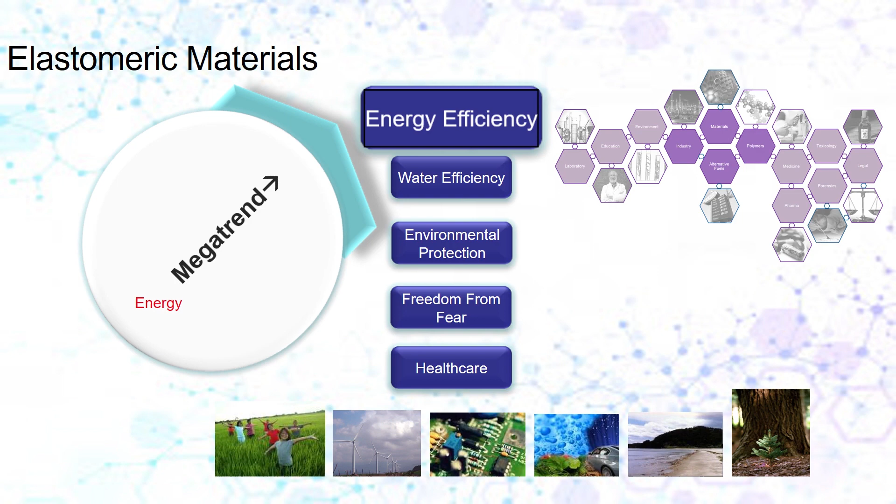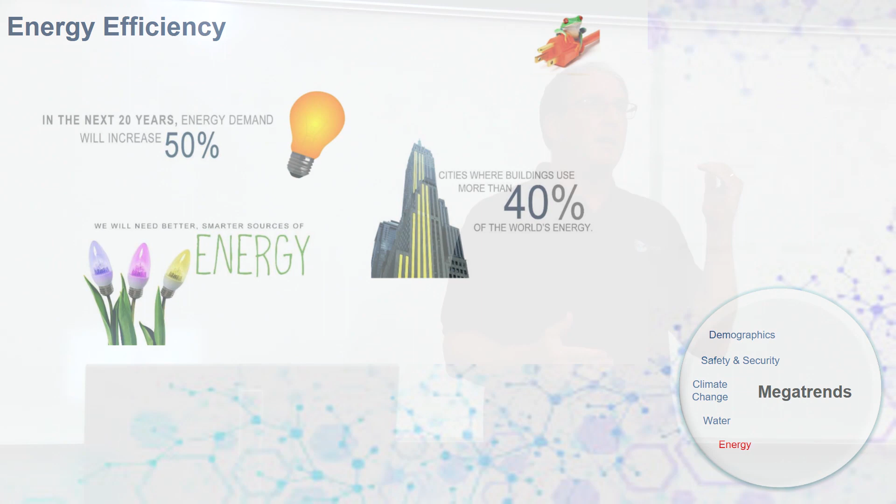Did you know, as a matter of fact, that in the next 20 years, energy demand is going to increase by 50%? That's because of population, and that's also because of a move from an agrarian society to a populous city society. And in those cities, they will demand...

...40% of our energy requirements worldwide. And that factor is growing. That's more than planes, trains, and automobiles, transportation. That's more than industrial. That's 40% of the total energy output of the world. We will need better and smarter energy sources.

Think renewable resources. I started the talk by saying what a chemist does is convert resources, yes? So we have to think about the non-renewable resources we currently use, which are coal, fuel, crude oil, nuclear, and even batteries—these are non-renewable—and start moving towards sun and wind and hydroelectric.

So how can a chemist light the way? Let me show you some examples—something I've worked on, which is LED lighting. And you see these all the time now: very lightweight modules, very high intensity lights that change color, can move directions in automobiles.

You've seen stadium lighting, where for very little wattage or very little current, we can produce much more light energy than incandescent technologies. And it's all based on that light-emitting diode, that little tiny chip that's buried usually many, many times over in these type of lighting systems. If we dissect that little thing, we find out that it actually has a diode inside that vibrates at a very high frequency.

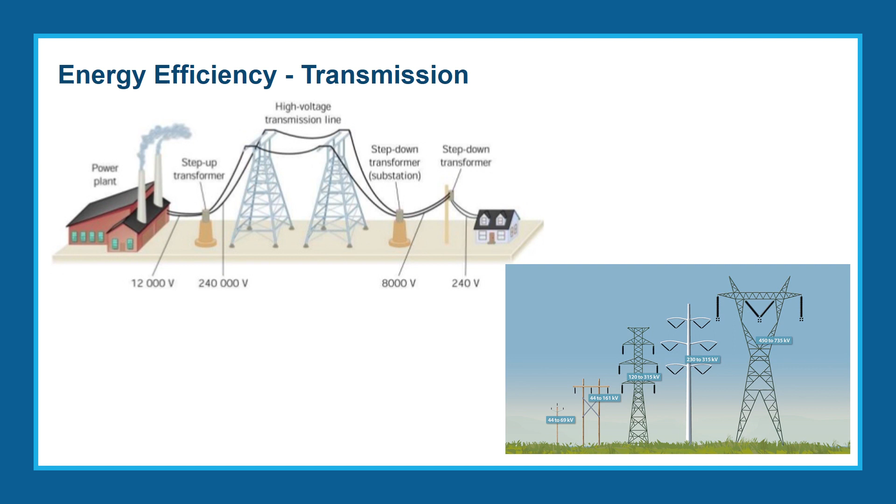What we want is an environment that looks a lot like this. But what we're starting to see is environments that look like this. So how can chemistry help? Because we're going to this.

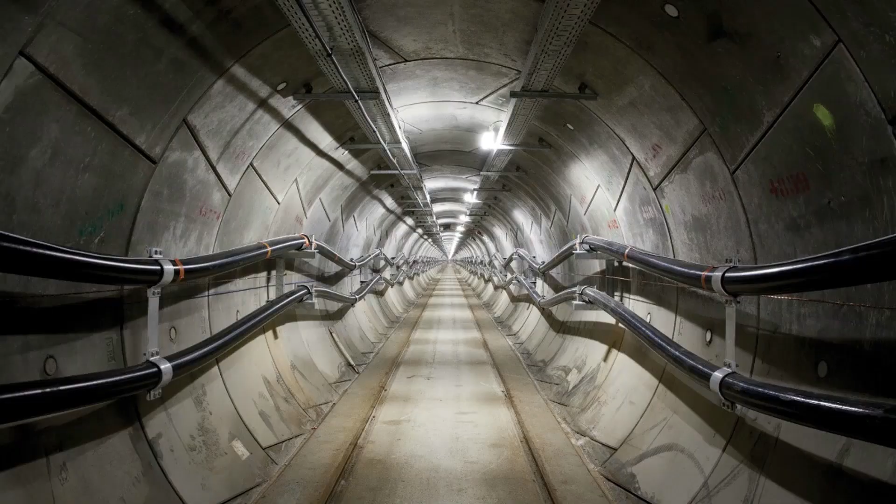Underground electrical distribution. You see these 4 cables. Each one of those is 750,000 volts. That's 3 million volts moving through there. If water or moisture gets in that tunnel and comes in contact with the electrification of those wires, you'll have an explosion that you'll certainly hear about on the news.

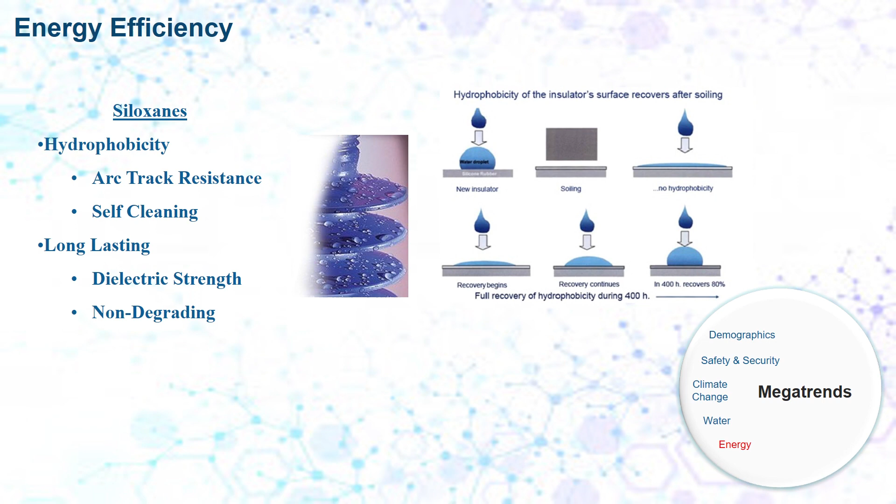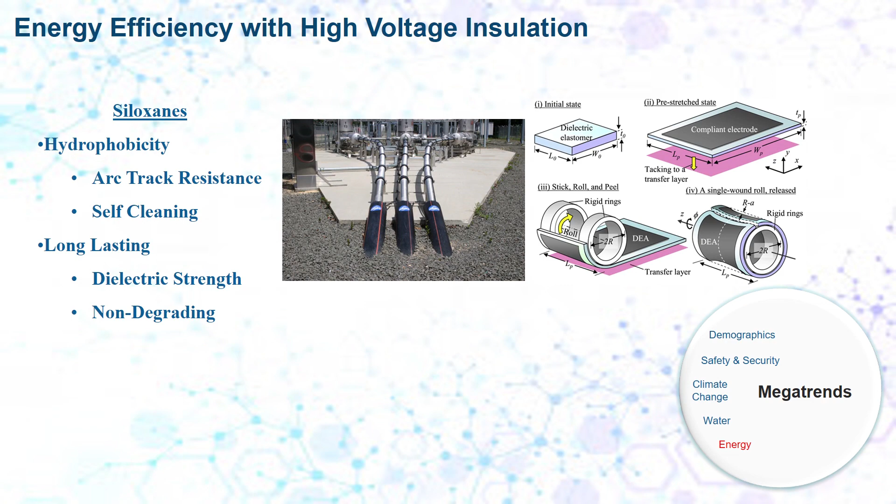So we developed a dielectric-proof siloxane system that first uses the hydrophobic nature of siloxanes to shed water. In studies, we're proving that that will go forth and do that for 100 years, so polymers that last. And in long-lasting, we have to build the dielectric strength of these polymers to a higher degree, which we do with multiple layers of sheaths. But the most important aspect are things that I've helped develop in the dielectric elastomer range. That's what makes these cables and this underground electrification much safer.

Birds, human beings, animals—as we increase the voltage of these lines and have them above us, they emit frequencies that interfere with biological systems. So placing them underground, around a conduit that's grounded itself, isolates us from that problem, and that helps the environment. It's certainly a megatrend.

So part of what I do—we took something of poor value and built it into something of high value. That was in terms of carbon black and a polymer called ethylene propylene diene polymer.

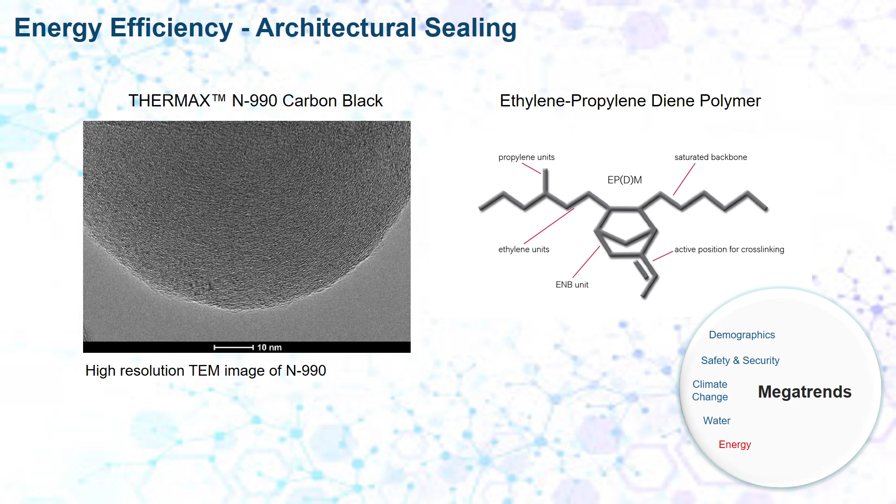Now you have to understand something first when I tell this story: up in Canada and other places where there's permafrost, methane gathers under that hard permafrost soil, what they call the hydrate stable layers. And that methane bubbles out. Did you know that methane is actually a stronger greenhouse gas than carbon dioxide? Sequestering methane is absolutely necessary.

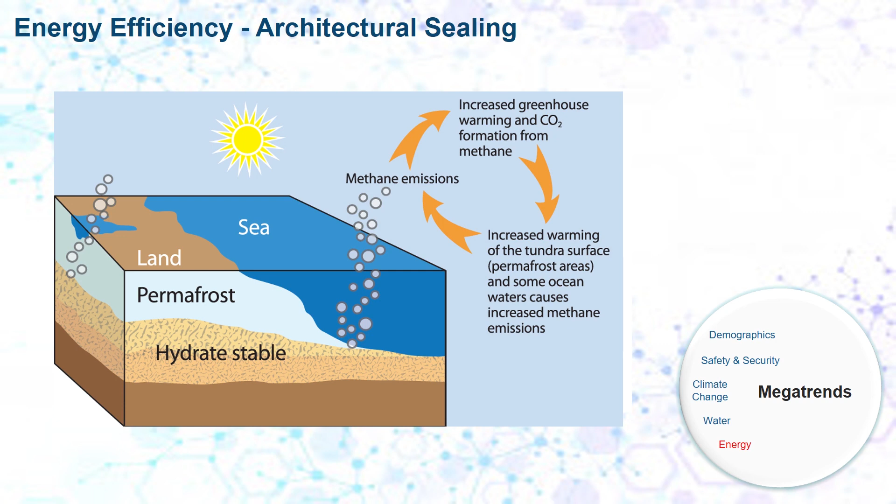And we found a way to do that by running the natural gas through a reactor that separates the hydrogen from the carbon. We burn the hydrogen off with oxygen, and what does that create? Water, steam. We take half of the energy and run 3 cities in Canada. All of the carbon, 100% of it, is converted to carbon black, a solid particle, which we condense from about 1,000 times in volume down to 1 unit of volume.

That carbon black is then put into rubber to make it strong and thermally insulated. And the rubber itself comes from a renewable resource—we make it out of sugar cane or corn. We don't use crude oil because that would be non-renewable.

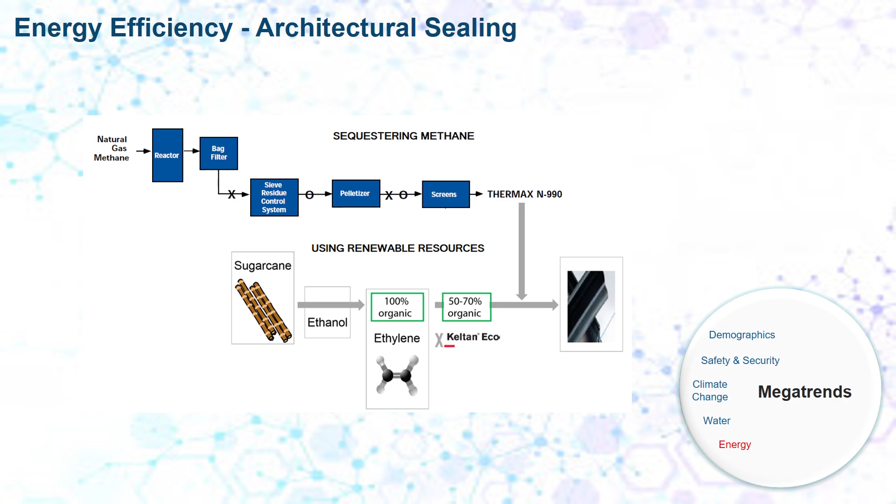We use natural crops, usually the stuff people don't want to eat, and then we turn that into ethanol. We synthesize that as an organic polymer, add the carbon black to it, and get thermal insulation seals that are now 98% efficient, turning our cities into fortresses that can protect human beings from the cold and from the heat.

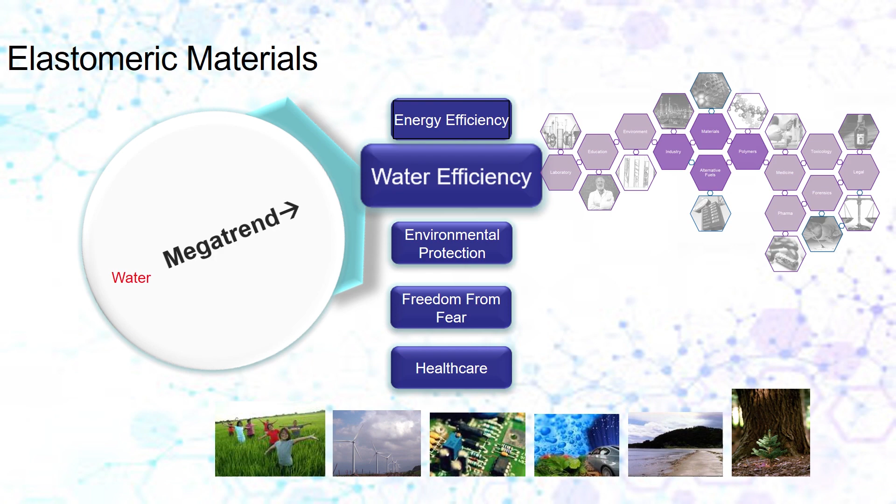Well, that was energy. Let's move fastly along in the megatrends to water. Did you know that eating beef takes a lot of water? We've all heard this: 1 liter of bottled water takes 4 liters of water to manufacture.

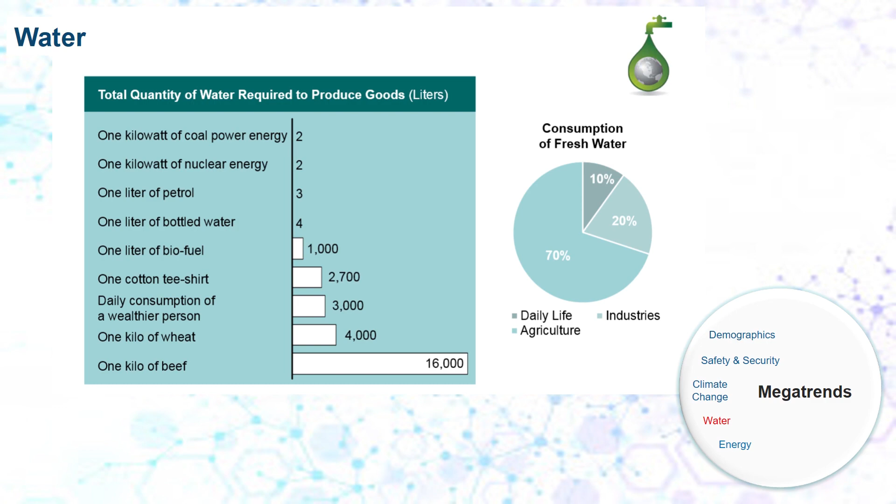Water, as population centers grow, fresh water particularly, is of major concern. The consumption of fresh water looks like 10% from the cities, but that's growing. Industries take 20%, but most of it is agriculture, a full 70% of freshwater consumption.

I want to relate this story as an interesting day for a chemist. About a decade and a half ago, I had 2 meetings in one day, one in the morning and one in the afternoon. My first meeting was driving right by here up to Pasadena to Jet Propulsion Laboratory, and I was very jazzed about this meeting. I was there talking to other chemists, PhDs, about how to get a rover to land on Mars. Those first rovers were called Spirit and Opportunity.

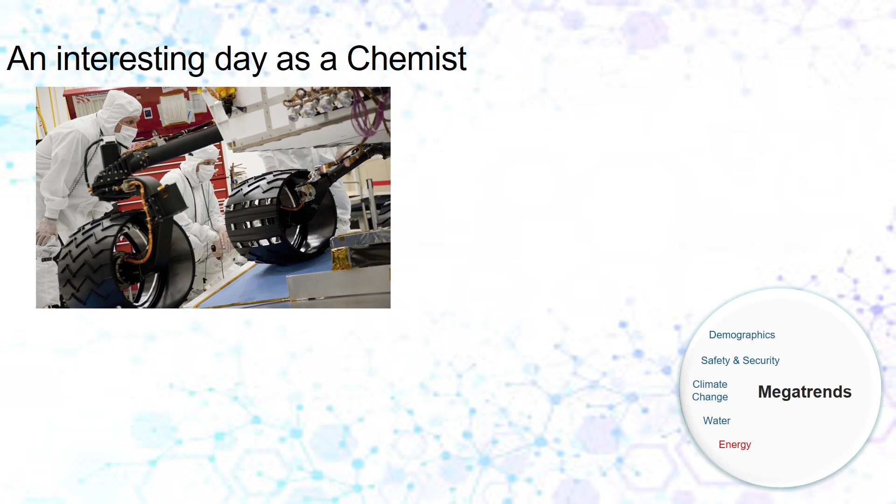And they had a problem. Mars is cold, and polymers freeze. If they freeze, and the rover's moving, the vibration will break all the wires, wire harnesses, and electrical connectors, and that rover won't last very long on the surface, maybe just a few hours. But we had just worked on a phenylated siloxane polymer, another siloxane derivative, that got us down to minus 182 centigrade before it hardened. Guess what the lowest temperature on Mars is? About minus 170. So we had a Mars-capable polymer. I was so jazzed because it was a great fit.

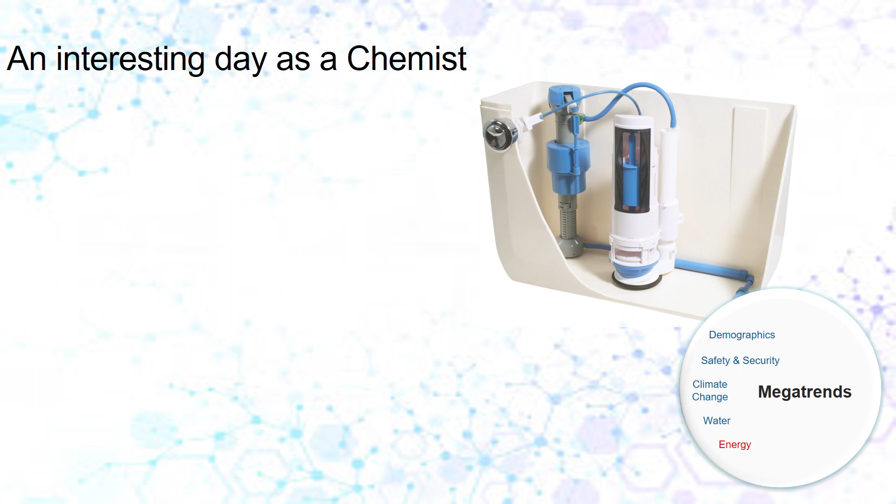We stayed there. It was an hour-long meeting that I just got out of at lunch to get off to my next meeting, which was down in San Clemente. I drove right by Cerritos down to San Clemente and went to a company called Fluidmaster. What do they make? Toilet seals. As a chemist, I'm trying to get something to Mars in the morning, and now I'm trying to get water reduction in each and every flush. I thought, maybe this second meeting really isn't going to be worth it. I mean, I was so jazzed by getting to go to JPL.

On one hand, the Mars missions were perfect landings, 300 million mile hole-in-one. It found blueberries, which were actually hematite formed in the presence of water. We proved that water was once on Mars. The atmosphere contains storms and twisters. Oh my, there's weather on Mars. Craters of uncovered rock formations gave the first off-world geology lesson, and they're still talking about it today. Because of those electronics, we were able to put a human eye on board, and we had panoramic views, just like you were there.

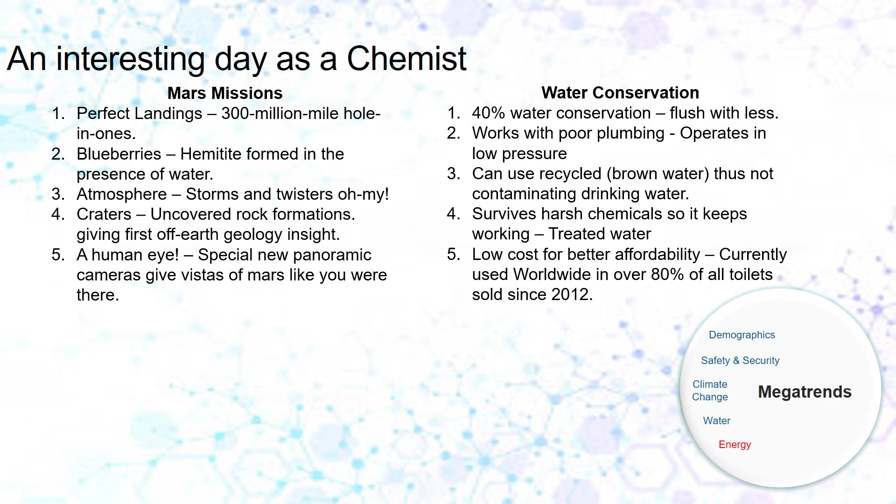But on the other hand, the second visit, we found a way to conserve 40% of the water each and every flush. It works with poor plumbing, low water pressure. It can use recycled brown water, contaminated water, thus not using freshwater supplies. It survives harsh chemicals, so we can use internal septic and not dump that sewage into freshwater supplies. There was low cost and better affordability, and today, since 2012, 80%, almost every single toilet worldwide, uses some of the materials I helped develop for that seal.

That's kind of boring though, right? On one hand, I got to work on these babies. On the other hand, I realized that fresh water, or the lack thereof, is killing major populations. In fact, toilets use 24% of the freshwater supplies worldwide, and leaks, which I'll talk about in a minute, are set at 12%.

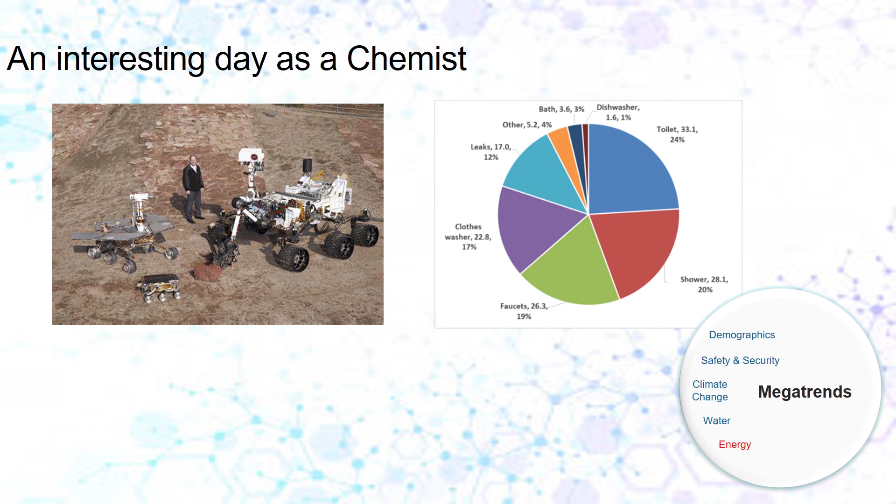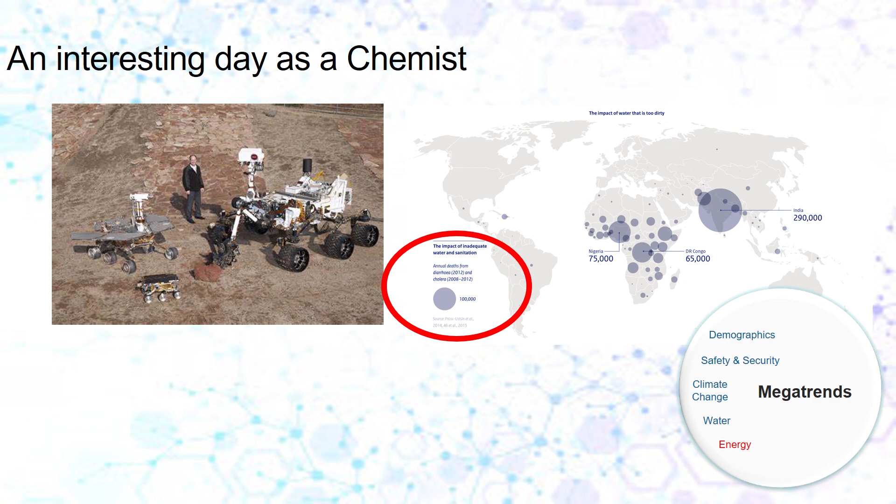I found this very interesting chart where in the years 2008 to 2012, before we had this system, these blue circles represent areas where cholera and diarrhea type diseases occur, and the size of the circle shows you the severity. In fact, over that period of time, it was estimated that over 100,000 people died from these diseases because of lack of fresh water and contamination with sewage.

I think back to those days, what was the most important meeting? Was it the one that got the rovers up there? Or was it the one that may have potentially saved tens of thousands of lives every year? I don't know, but that's what a chemist can do.

So, now, water efficiency also is an important aspect, especially around here in LA.

A couple years ago, there was a huge leak in the Pauley Pavilion at UCLA. I show a picture here. That pavilion was swamped. All of the seats, the entire thing had to be reconstructed. It was down for 18 months, cost millions of dollars.

We see this happening over and over again. In fact, the EPA is estimating over $300 billion in the next 10 to 20 years to build the infrastructure up.

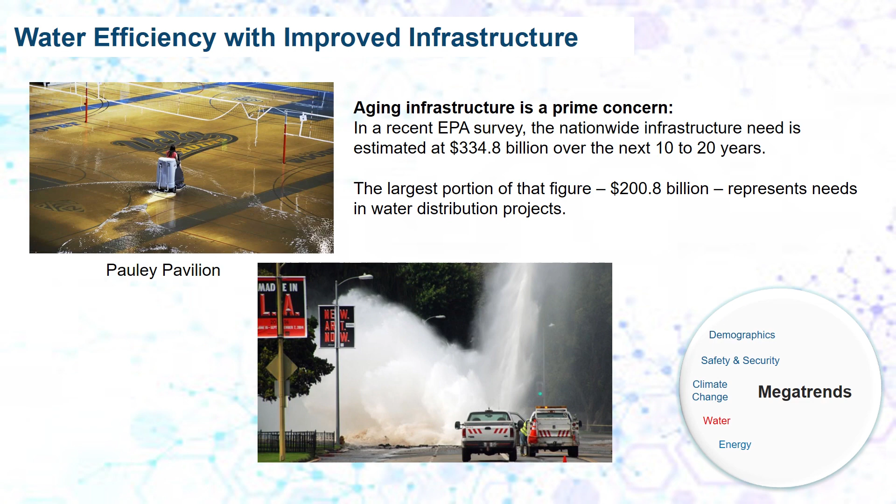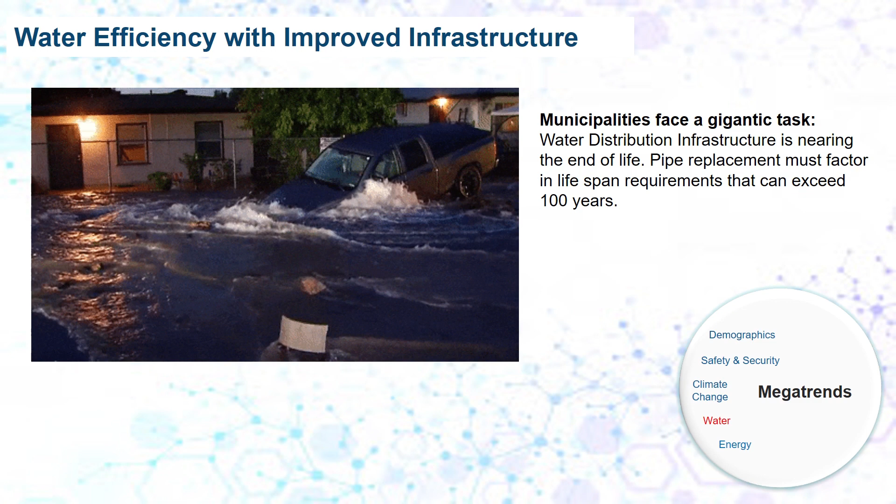The largest portion of that, some $200 billion, represents the need for water distribution projects within municipalities. And the municipalities themselves are asking questions: we don't want to replace this stuff every few years, we want 100 years before we have to touch it.

But that, with existing technologies, is a very hard task indeed. In fact, they only have 5 choices. They have ductile iron piping, vitrified clay, and concrete, but these 3 have some inherent problems. They're just exactly what's there now, with short-lived life expectancies.

But we're now developing polymer systems. Yes, chemistry again, HDPE and PVC. But what we find is they still have a strong failure mode called sealing at joints.

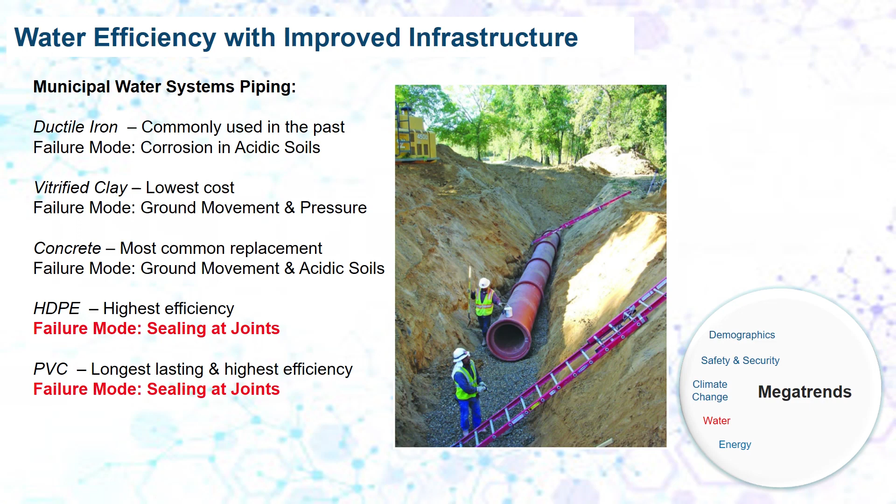So this is the old way we created water piping and sewage piping. This is the new system. These, particularly with PVC, last 100 years under the ground. Polyvinyl chloride is resistant to microbial growth, and it will hold together for that period of time. You see the black seals inside the blue flanges, and the brown seals outside of those pipes.

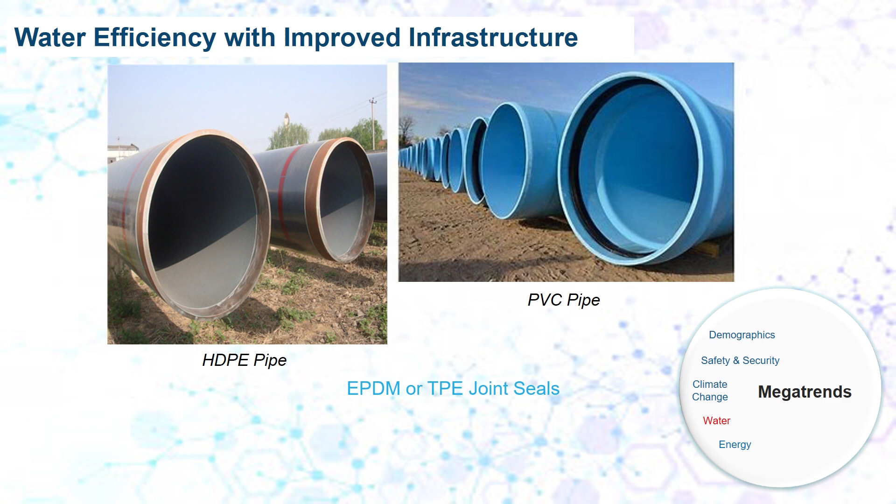Now, what we're working on right now is using that eco-friendly EPDM and Thermax N990 to take these nuisance methane gases, sequester them, and actually use that to control our environment. So write this down: double whammy. That's what a chemist can do. We can take a nuisance gas out of the environment and we can put it to use to further protect our environment. Double whammy.

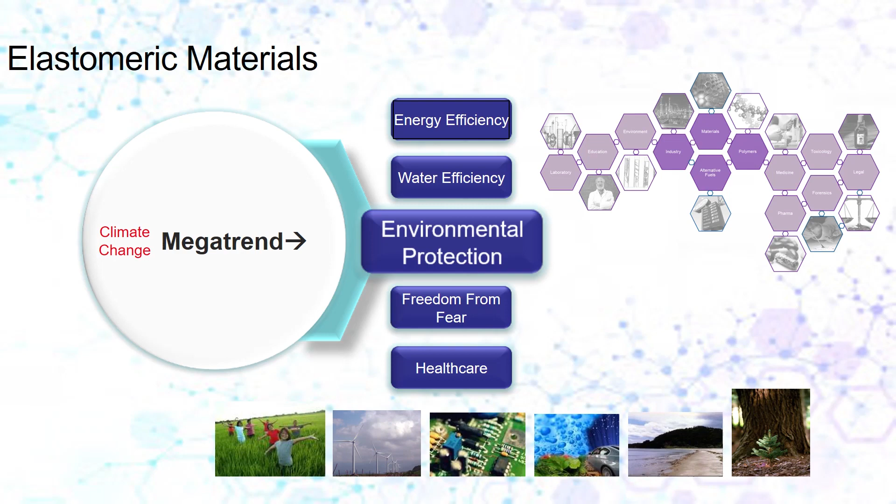So let's switch to another megatrend, climate change. And let's look at environmental protection. I want to talk a little bit about burning of fossil fuels. It's a little bit of my pet peeve, but not a political one like we see in the news.

As a chemist, raw materials are what makes things work. And if we keep burning all of the important raw materials, someday we won't be able to make polymers anymore. And that will be a very bad day. So I have, as a chemist, an even greater need to protect the environment than, say, the common citizen. It's my whole way of doing business. Those raw materials are important to us.

So did you know that beyond CO2, and we hear a lot about CO2 generation and the greenhouse gas effect that creates, VOCs are another important issue. VOCs, volatile organic compounds, are prevalent from both industries and transportation. We've done a lot of work on that because VOC mixing with NOx gases produces a high degree of ground ozone, which is also very poisonous to human beings, very destructive.

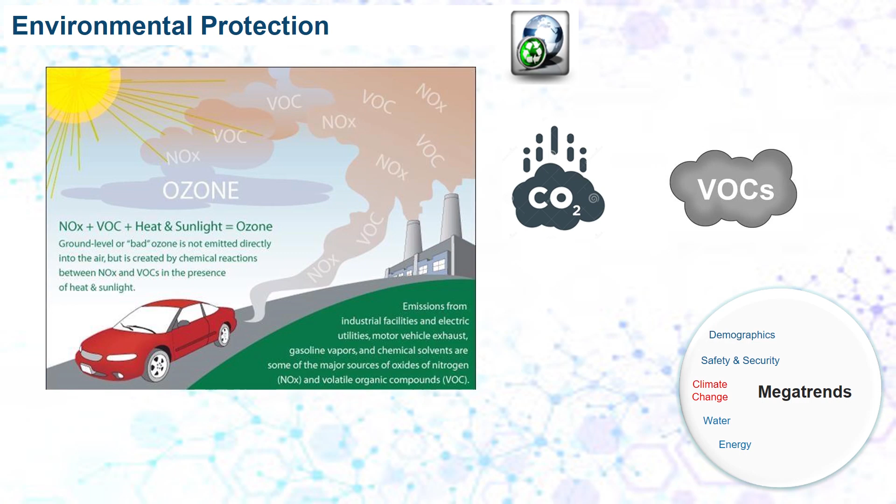And so we've worked on programs based on fuel recovery. The fuel vapors - you probably go to the gas station and put your nozzle in a tank, and around that is a sheath. That sheath is stage 2 vapor recovery, but it's only about 70 to 75% efficient. We're now designing onboard refueling vapor recovery systems that will take that to almost 100% efficiency.

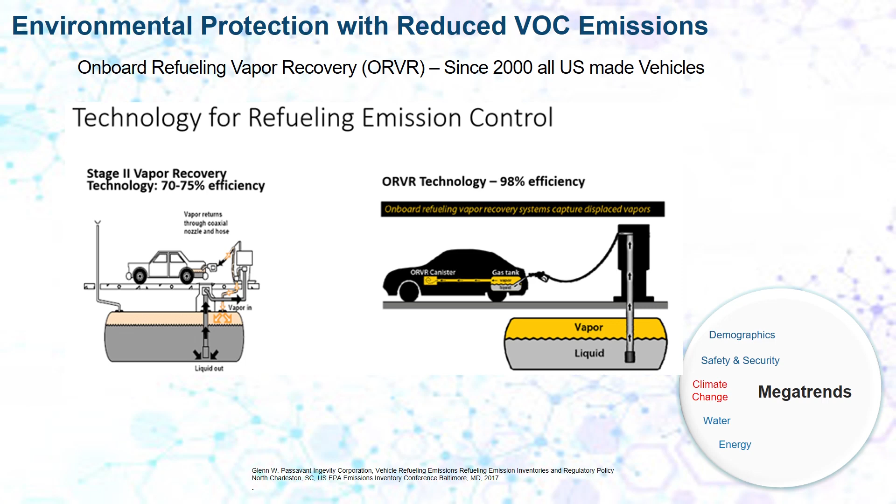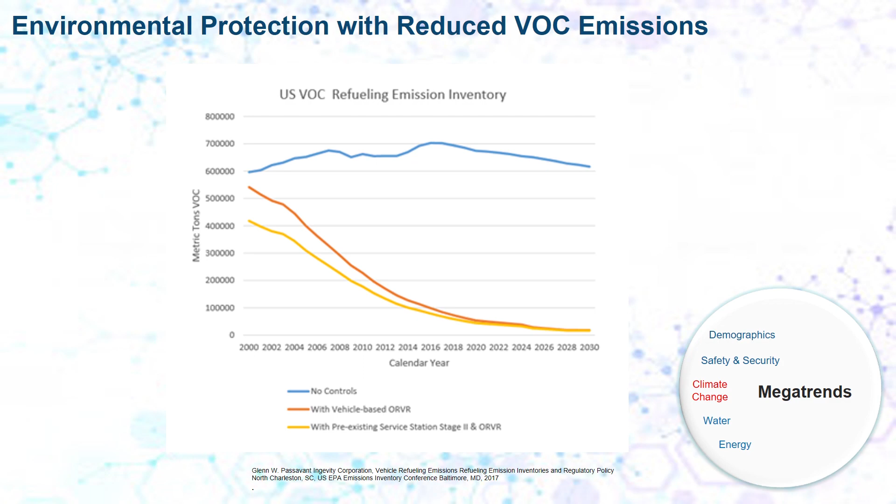And the way it would look in 2020 today, if we hadn't built these recovery systems, we would be putting 700,000 metric tons of VOCs into the air, which would be responsible for over 40% of the global warming power. But because in the United States, and only the United States, we've implemented this, we are saving the environment. Other countries like China, Asia in general, and India are not implementing these types of savings.

And this is some of the areas we need to focus on. It's not just CO2. Man is creating an indelible imprint on this environment, and we need to look at all those sources, not just focus on what the news asks us to focus on.

So how do we do that? With something called fluoroelastomers, fluorinating elastomers. And we do this with ethylene propylene again, and we are fluorinating them with halogen sources, fluorspar. We've just opened new mines in the US so we can generate these polymers.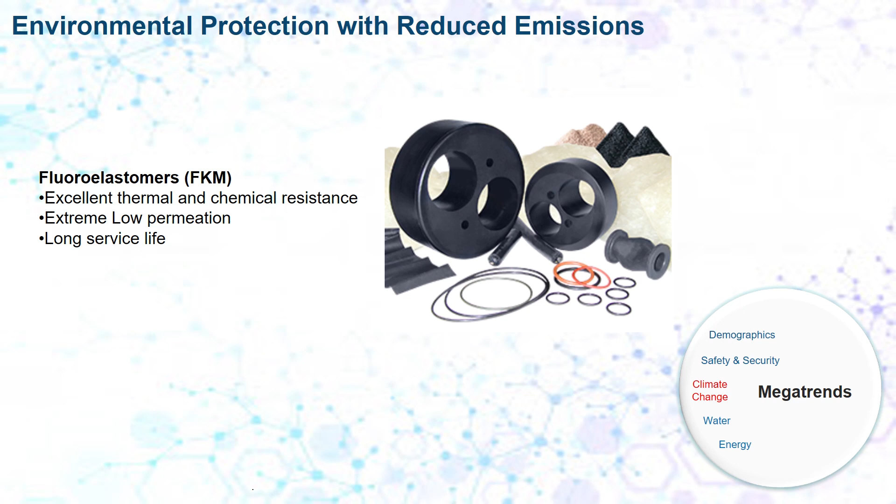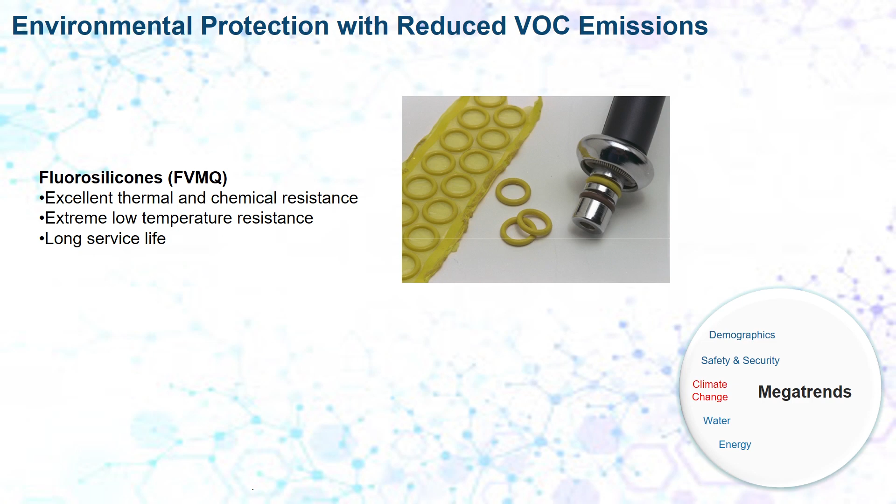So here's my story. In 1990, if you bought a car then and left it with the engine running inside your garage, or the engine not running inside your garage or on the driveway, that vehicle would pollute the environment more than a modern automobile traveling down the freeway at 70 miles an hour.

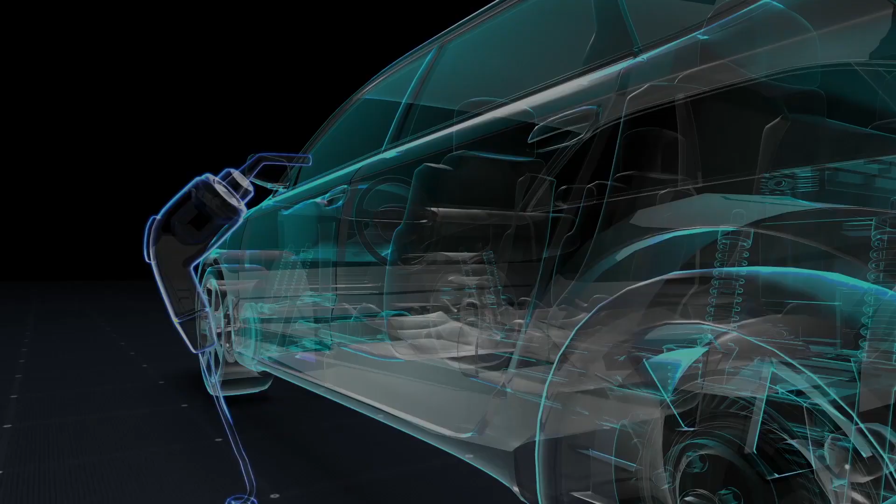Electric vehicles are on the rise to help reduce greenhouse gas emissions, but they do have some constraints, such as long charging times and limited accessibility of charging stations. What if we could charge our vehicle batteries on board using hydrogen fuel cells? Or even better, what if our vehicles had efficient storage, supply, and refueling systems designed for hydrogen fuel cells? Revolutionary fuel cell vehicle designs using polymer electrolyte membrane technologies, also known as PEM technologies, are already starting to emerge. RD Abbott teamed up with Cancarb and Arlanxeo to explore elastomer sealing performance advancements using Thermax N990 and X-butyl bromobutyl designed for hydrogen fuel system technologies. In this study, we employed hydrogen permeation testing at elevated 90 degrees Celsius to better mimic the current operating conditions for PEM fuel cells.

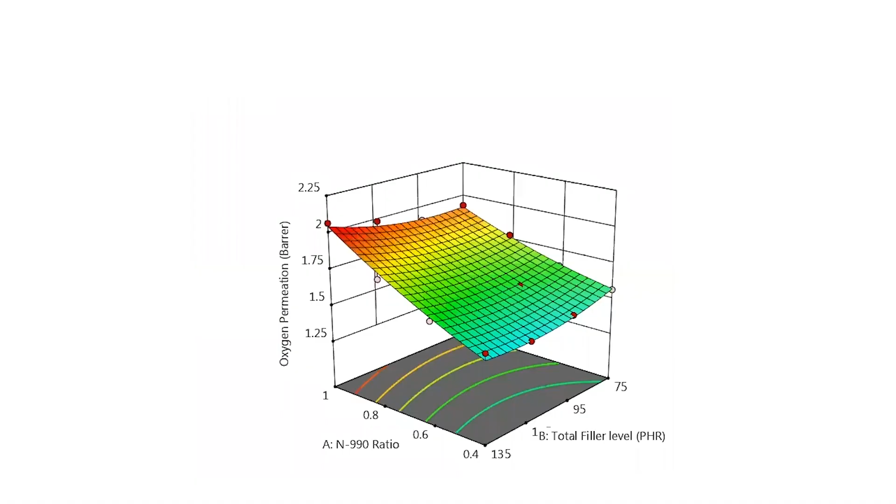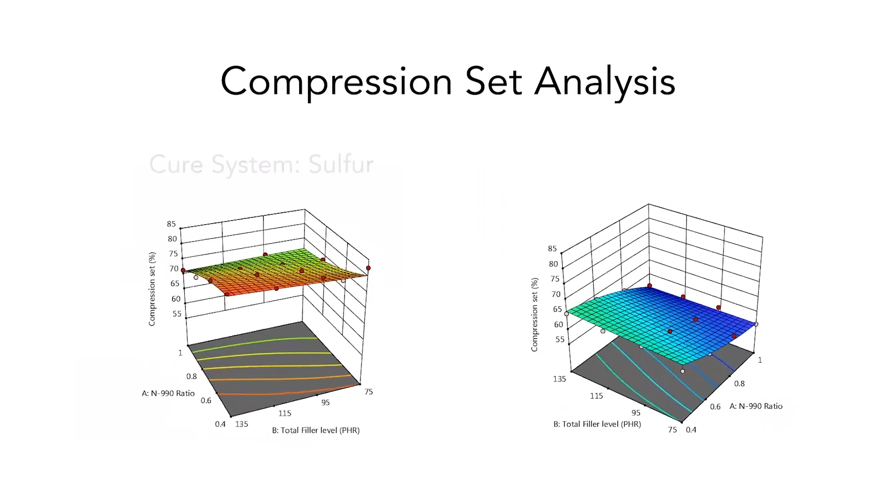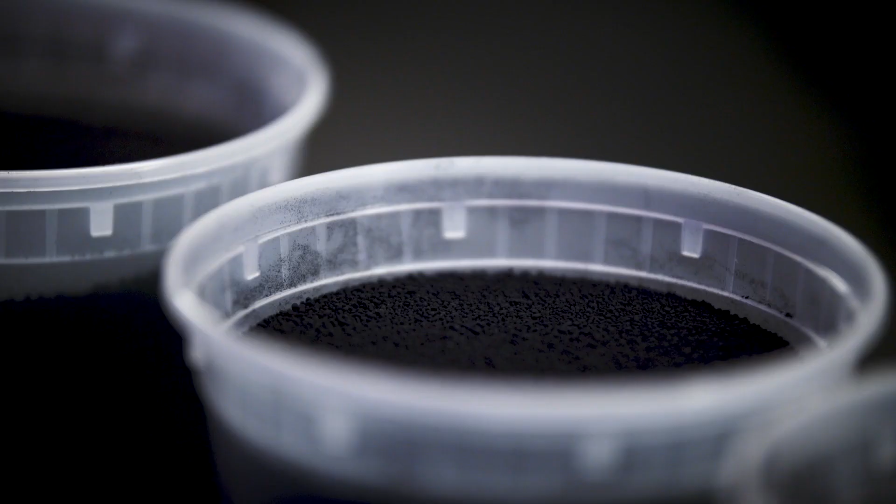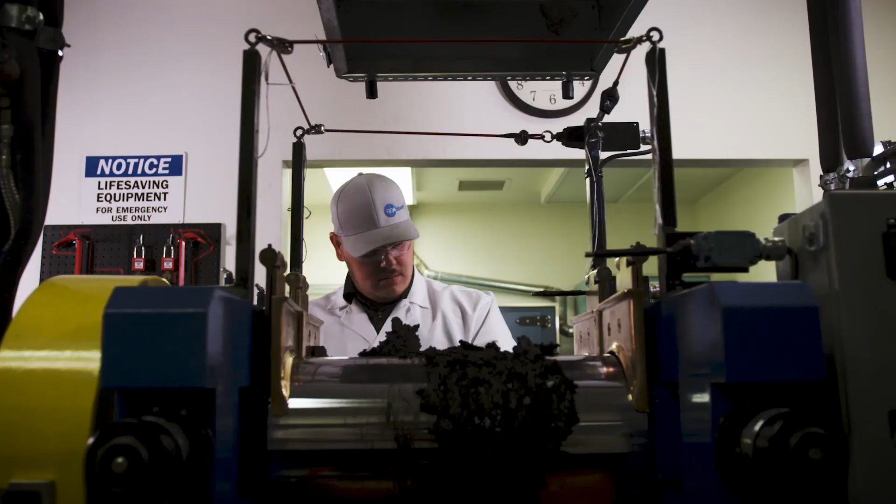We evaluated these permeation-resistant polymer systems with synergistic tortuous path mechanisms in a fuel cell operational environment. Based on our findings, here are some benefits for using Thermax N990 and X-butyl bromobutyl-based compounds designed for use in hydrogen fuel system applications. With Cancarb's Thermax N990 carbon black, enhanced tortuous path permeation resistance with quasi-graphitic structures filler technology, optimal sealing performance with key physical properties such as tensile and compression set, excellent molding and extruding processability, and economic advantages from high filler loadings. With Arlanxeo's X_Butyl bromobutyl polymers, superior permeation resistance and versatile cure chemistry of the base polymer, enhanced processing performance and physical properties, and acceptance of high Thermax N990 filler loadings.

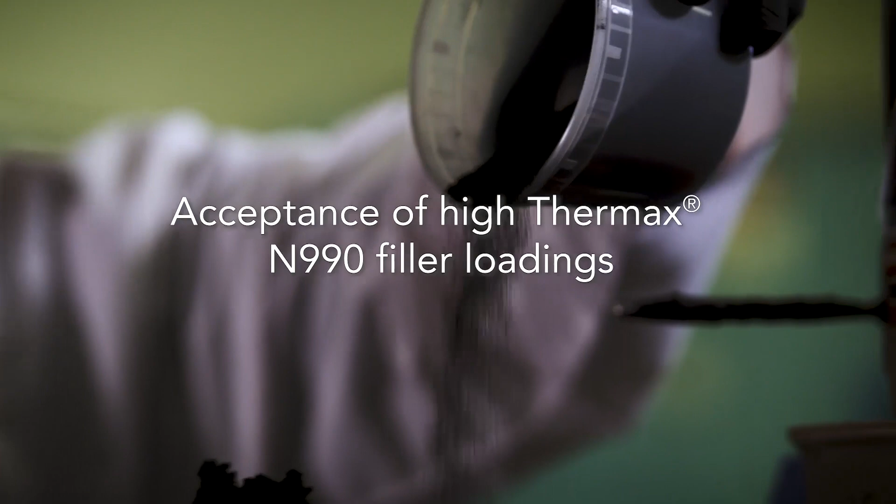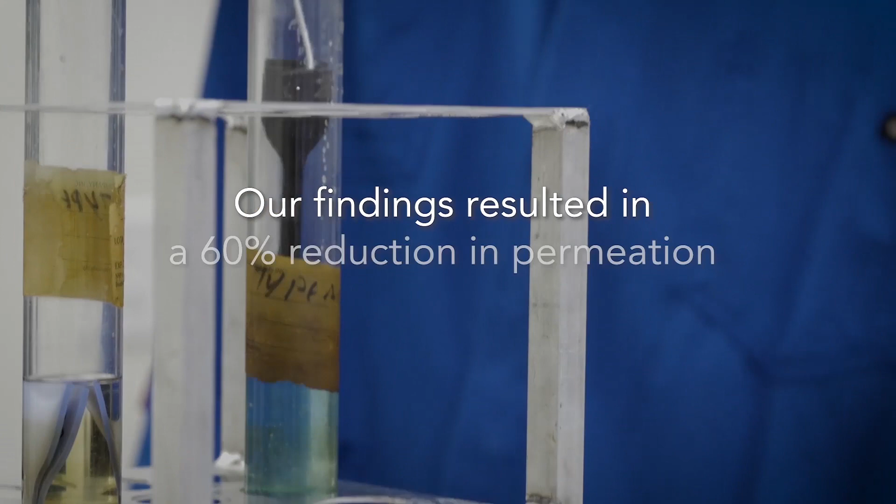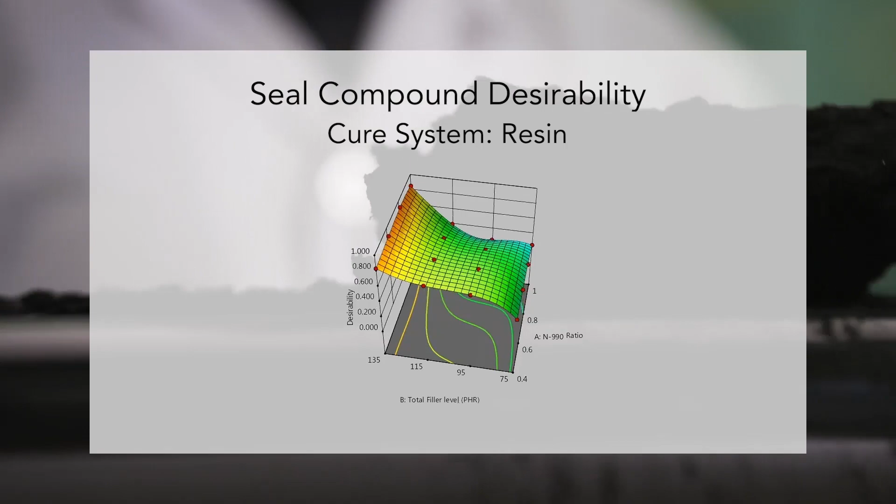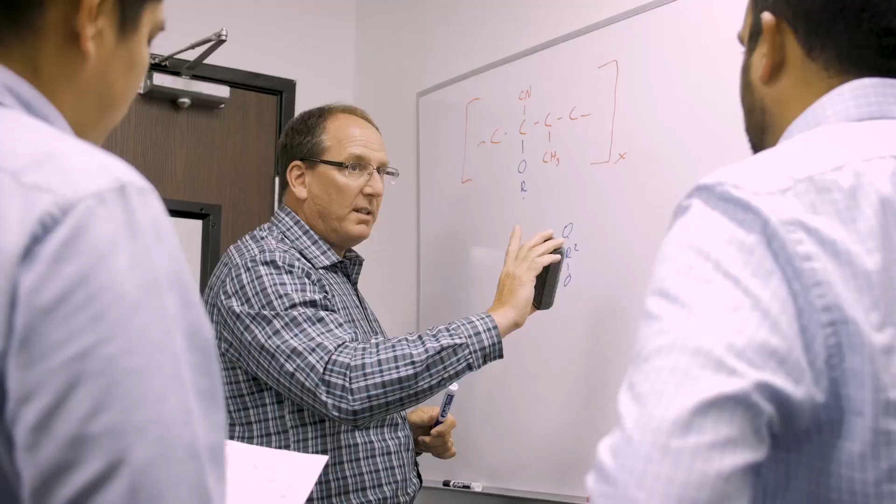Potential applications include gaskets, hoses, tank linings, and O-rings. Our findings resulted in a 60% reduction in permeation over traditional technologies. This indicates that elastomeric seals using Thermax N990 and X-butyl bromobutyl greatly minimize hydrogen fuel losses. Not only can these advancements improve the efficiency of hydrogen fuel cell delivery systems, but they can also lead to safer operation overall. This is just the latest collaborative applied curiosity from RD Abbott and our supplier partners. We're working to answer complex questions, improve sustainability, and promote positive environmental changes.

So this is a paper that was presented. You can definitely get on the website and read my paper. It's good bedtime reading, I promise, you'll be asleep by the third page. It's papers that we present when we have these important findings. Last year I gave five of them at the ACS. This year I gave three of them.

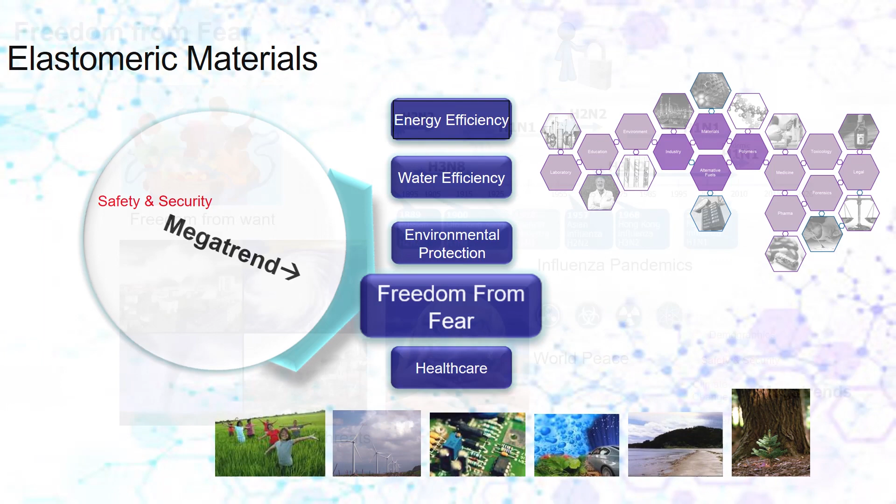So, climate change. It's a very political issue, but I hope that we vote our conscience coming up. Safety and security, the freedom from fear, is our next megatrend. Let me say that we probably can't do much about freedom from want or catastrophic threats or world peace with chemistry. But we can definitely find ways to affect our safety with respect to influenza pandemics.

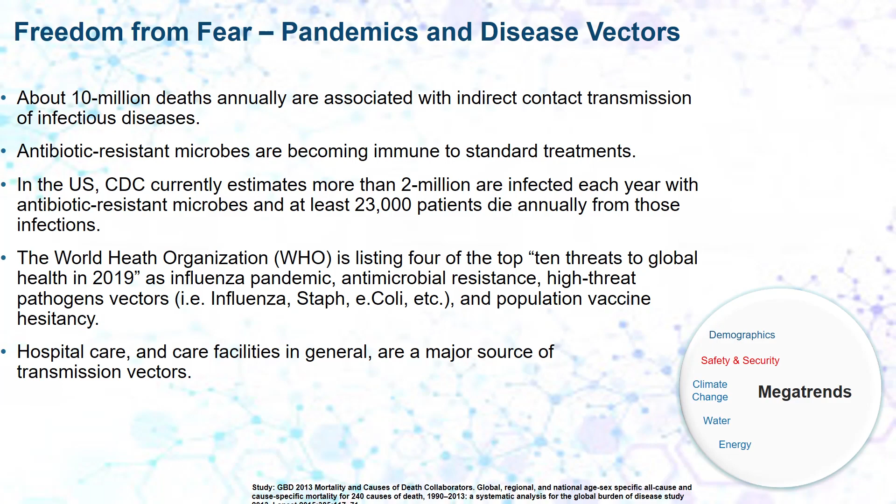About 10 million deaths occur annually associated with indirect contact transmission of infectious disease. Antibiotic-resistant microbes are becoming immune. In the US alone, the CDC currently estimates that 2 million people are infected each year with antibiotic-resistant microbes, and 23,000 people die, and that's growing. The World Health Organization lists four of the top 10 threats to global health in 2019 as the influenza pandemic, antimicrobial resistance, high-threat pathogens, and the one that really astounds me is population vaccine hesitancy. Folks do not want to get vaccinated. They want to go to the doctor and get cured. But for these pandemic-type diseases, hospitals are where the vectors of infection most commonly occur.

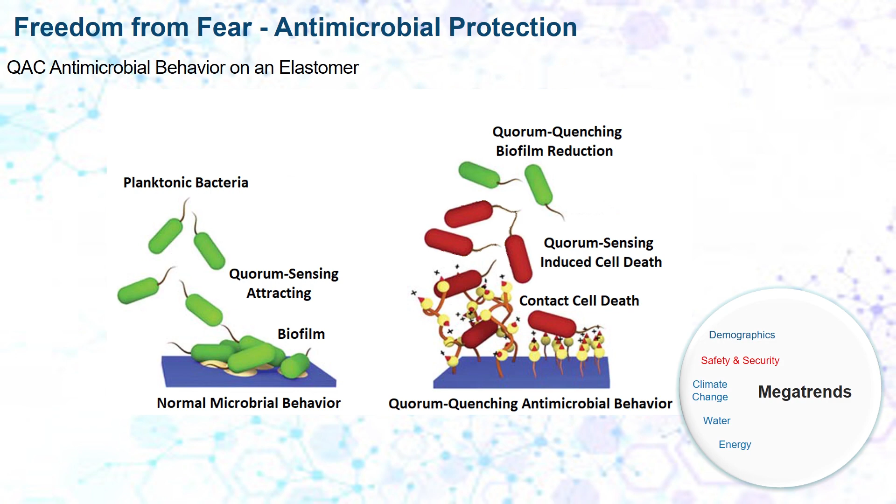And then the residual biofilm reduction runs away from that area. In just 10 minutes of contact, we're able to reduce the number of bacteria on a surface by 10,000 to 1. Here's the proof: red is dead, green is alive. After 10 minutes, using confocal laser scanning microscopy and dyeing the specimens, we're able to kill the bacteria on the surface of a substrate and thus keep it clean.

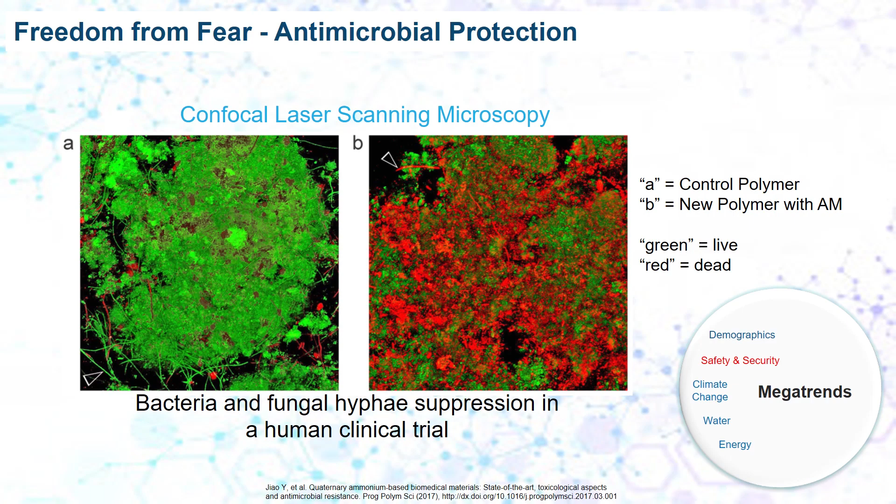And there's no running out of this. That substrate will continue to do that for the life of the substrate. It is bound in the substrate. It is not leachable, it is not extractable. It doesn't hurt human beings, it just kills the bugs.

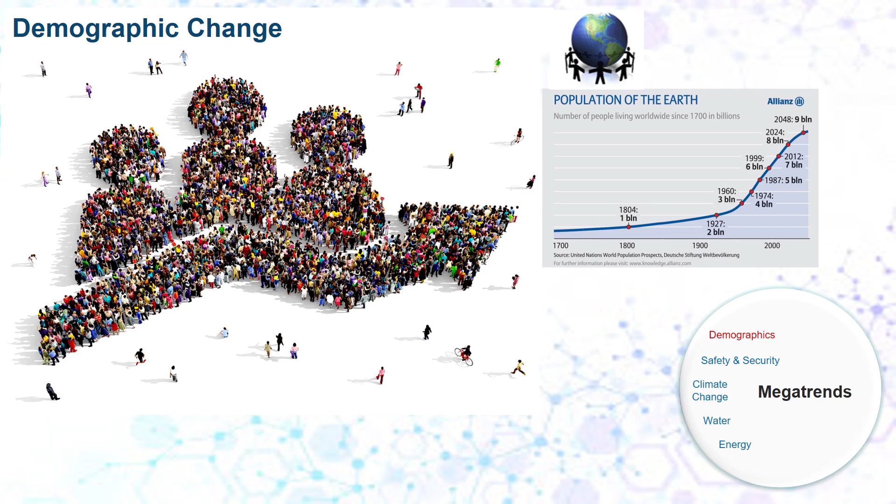So let's move on to the last, demographics. This is the one most important to me for reasons you can probably imagine, because I'm going to talk about the aging population. It is a great thing in our planet that in just a few years, 30, we would probably reach 9 billion people in population. That's an amazing factor. In fact, it is true that there are now more people older than the age of 65 - I'm 57 -

than 5 or younger. And in about 2018, the graph inverted, and it's going to get more and more so. So how are we going to help this aging community? Help me, that is. Will is outside at the booth, and this is his technology about carbon nanotubes and putting them into doped silicone and creating useful devices.

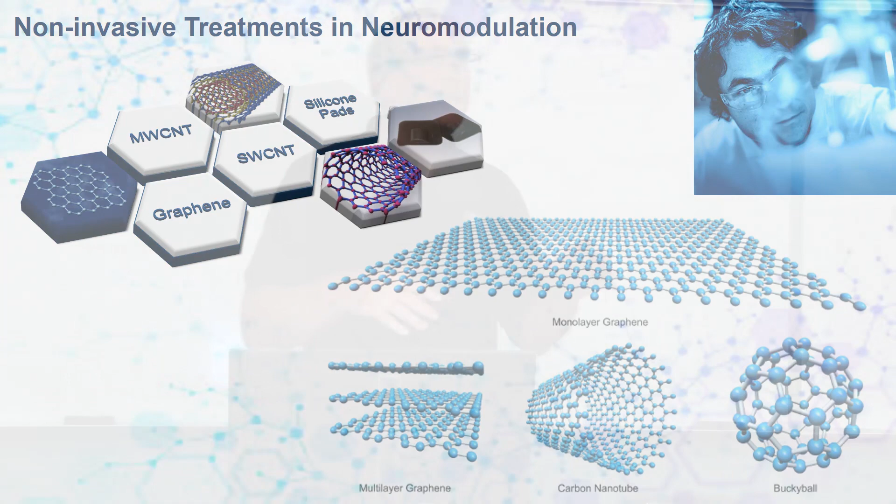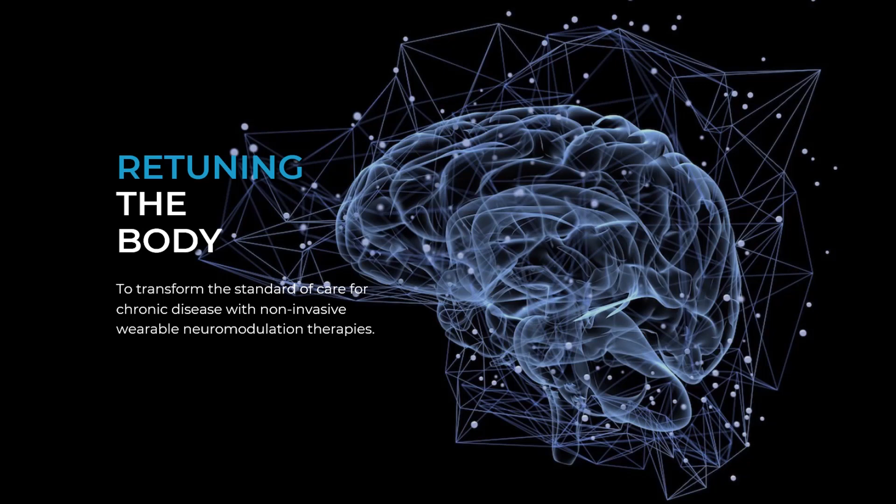Again, carbon sequestered, silicone polymer from a beach, and we're creating a medical device that can do some of the following things: retuning the body with wearable neuromodulation therapies. This is a new technology, and it's coming.

Our first example is essential tremor, and I'm starting to get that a little bit - I shake a little. As we get older, that medical condition is characterized by involuntary rhythmic contractions and relaxations, a progressive neurological disorder, so it's going to be worse as I get older, and the most common movement disorder. It affects 4% of the population below the age of 65 - lucky me, I'm in that 4 - and 20% over the age of 65.

So we have found a way to read the human nervous system with an extraneous patch. We found that the basal ganglia, the cerebellum, and the sensorimotor cortex can be controlled by the ventral intermediate nucleus. So that's the complexity of the neural network, and we can control this feedback.

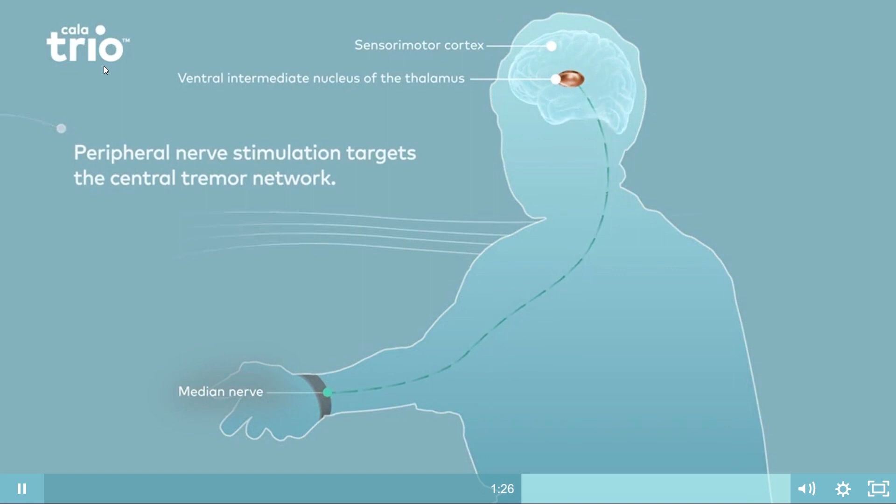Here's a patient who's trying to write with essential tremor. The device that we helped create, at least the materials of the device, are wrapped around the wrist. There's a period of time where it starts to learn the impulses. The shaking produces a movement, which the watch can then read, and then it senses the stimulation and sends a counter wave, sine, cosine, to that wave, and changes the intermediate nucleus behavior.

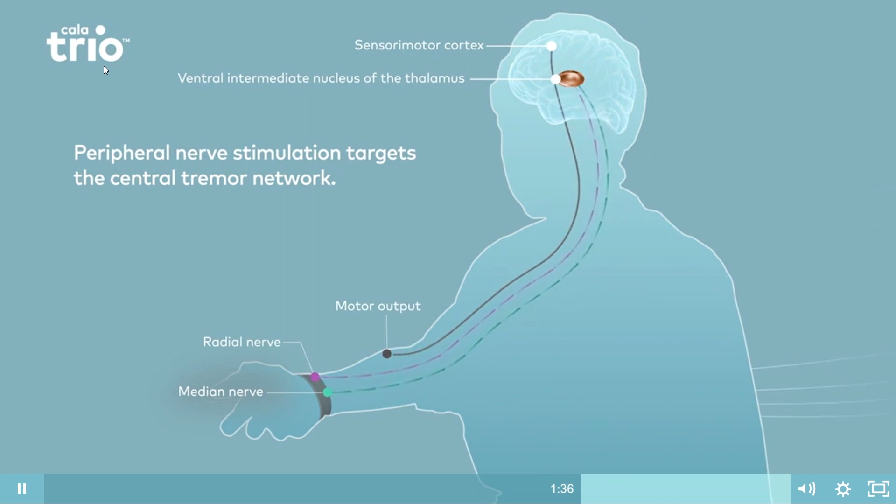Now watch her write. That was a simple one-time wearing of just 40 minutes, and that therapy will last for days. We find 75% compliance - that's an amazing, amazing outcome.

The way we do it is with 3 silicone-doped pads with carbon nanotubes, single-wall carbon nanotubes, that can transfer very accurately the electrical impulse from these nerves to the brain and read them and send a counterwave to stop the shaking.

Watch out - when some of those companies like Nike get a hold of this, how would you like to go to the basketball court unpracticed and make 10 slam dunks or 10 free throws in a row every time? Just turn on the watch and it'll teach your body how to get that perfect movement. That's what's coming, guys. Sports will be completely different.

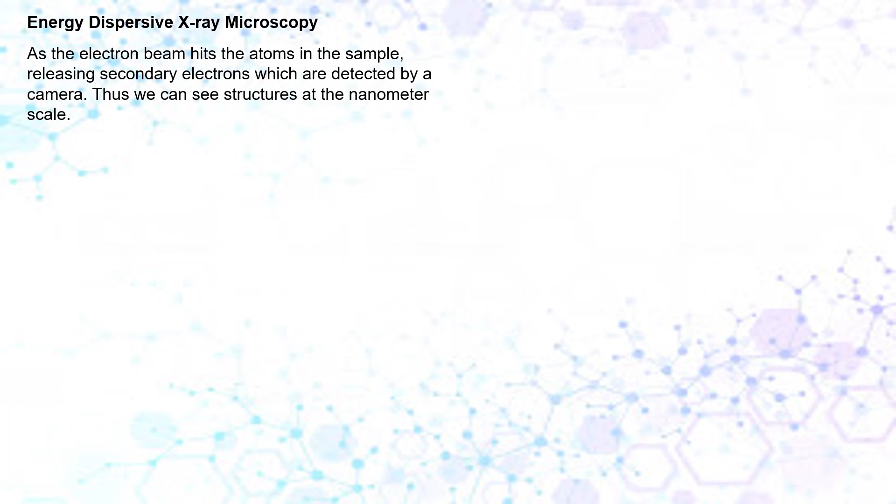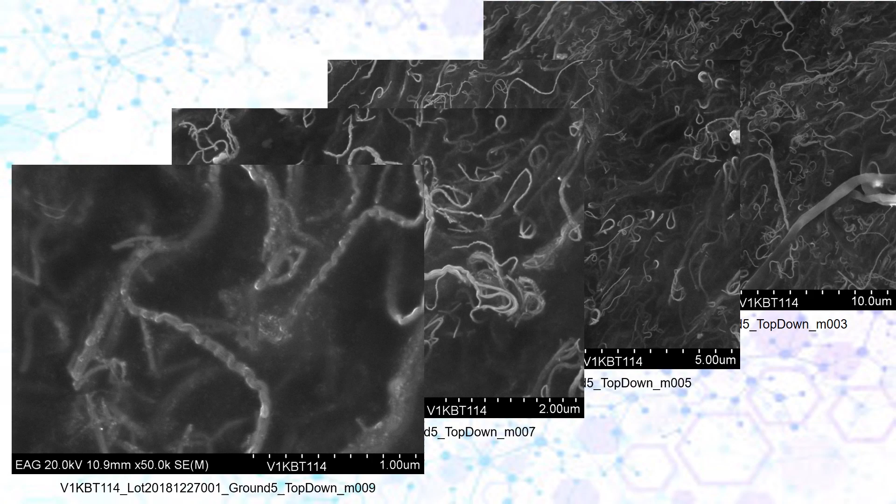I wanted to show you some carbon nanotubes with electron microscopy. What I'm showing you here is carbon nanotubes down to the micrometer size, and what I'm going to do is blow it up for you in successive blow-ups. That's a single-wall carbon nanotube. And what it does inside of a silicone is it creates literally trillions of electron paths that search out that electrical signal, read it.

The computer makes that calculation, and then through a second patch produces that charge to counter or to control the muscle behavior. Perfect free throw percentages are on their way.

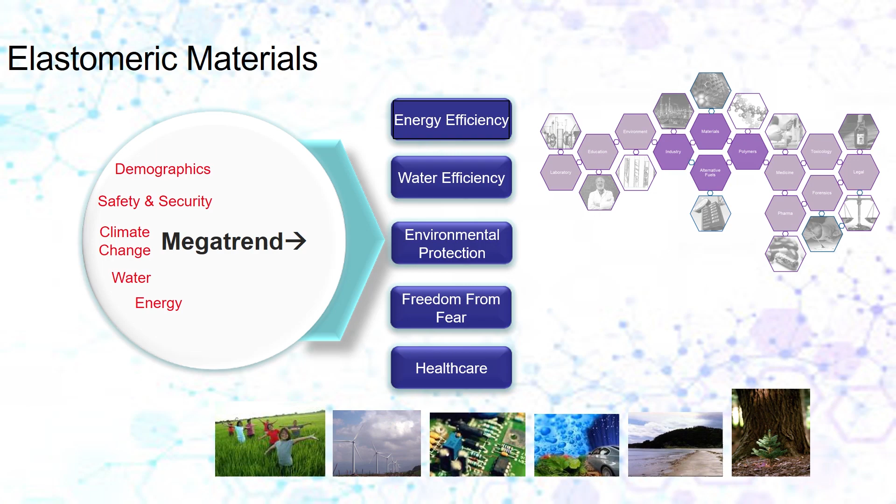Okay, so that's pretty much the end of my talk. We've covered all of these important megatrends: energy, water, climate change, safety, security, and demographics. I talked to you a little bit about my career and a couple of stories. There's many more - come visit me out on the booth.

Remember all of the possible careers and chemistries and how you can make a difference. That's what a chemist can do. That's what I've tried to do, and I've had a lot of fun doing it in 35 years. I plan to be around for another 20, so I'm not going away.